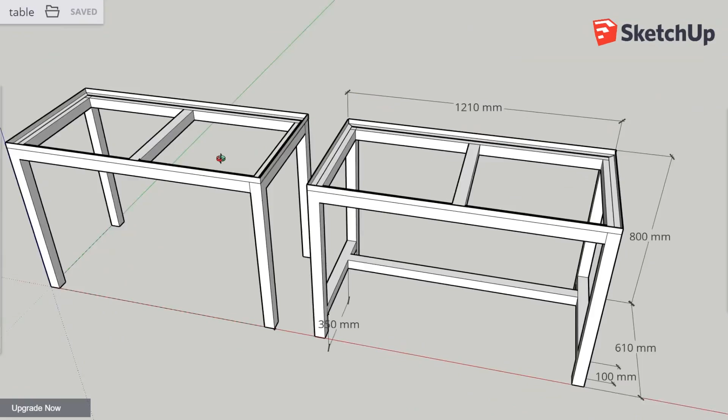So I've just started actually to use SketchUp a lot more in terms of getting ideas down and just trying to visualize stuff in a software program. This is SketchUp Free, and it's an online resource, so you don't have to download anything to your computer. It's cloud-based, I think, and it's free to use. You don't have to pay any money for it. But what it is really good and useful for is rendering out your ideas.

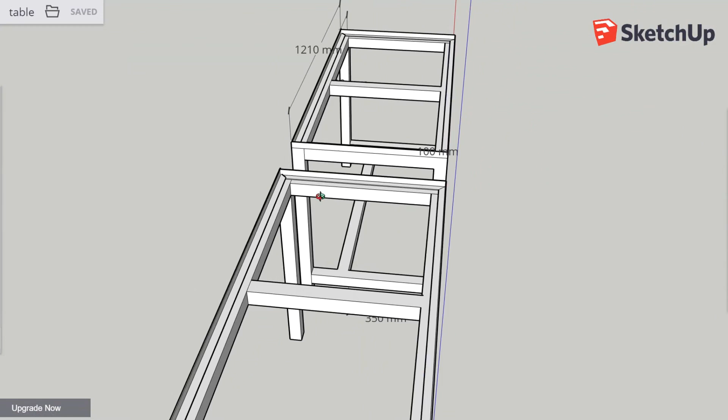So in this instance, the guy I'm making the table for didn't really know what he was looking for, so I gave him a couple of options. Even down to the detail of maybe how the top goes on, or in this case, how the cornicing works and how that's going to sit in, the basic kind of details.

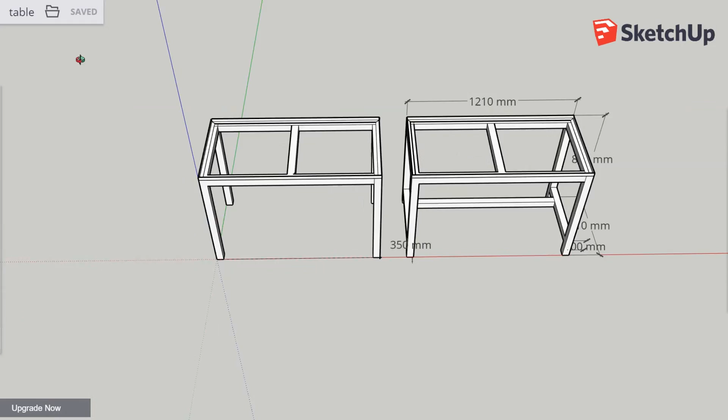But what it allows you to do is give all these different angles and views, and you can just screenshot or record this and send it on and say, well, that's what I think. There's the sizes, dimensions, everything associated with it. What do you think? And it gives your clients or the guys you're making stuff for a really good idea of what you're up to. So yeah, it's really improved my workflow anyway, so maybe give it a shot.

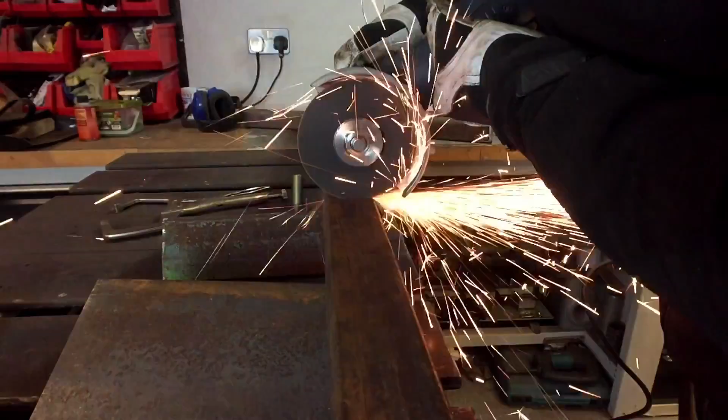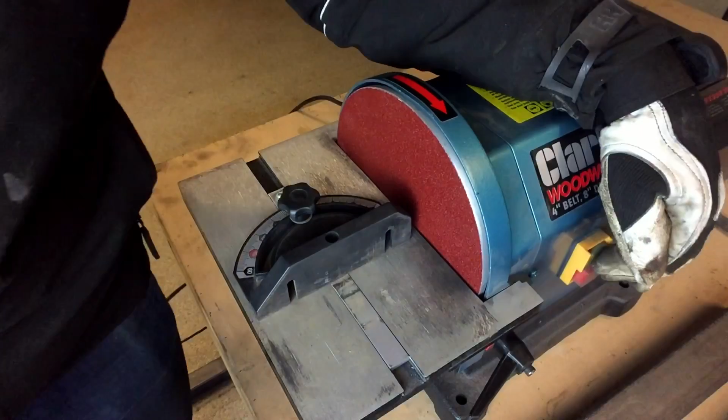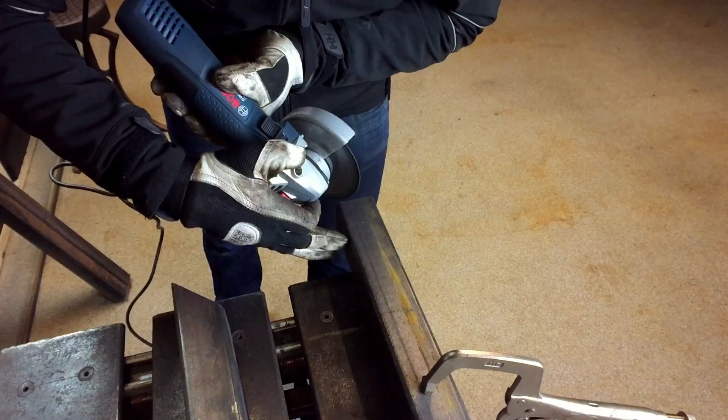Obviously you want to get your base stock material all nicely cut up and ready to weld. I guess you could use anything, even down to a hand hacksaw if you had the time. But one of the fundamental principles is getting things as square as they can be, ready for welding. I do tend to use an angle grinder for most things, just because that's what I'm used to using. It does take a wee bit of time, and if I had another choice, like maybe a bandsaw, I'm sure that would be a better option for me.

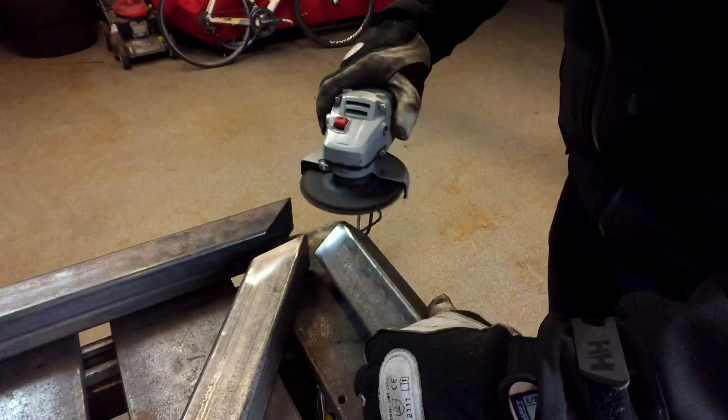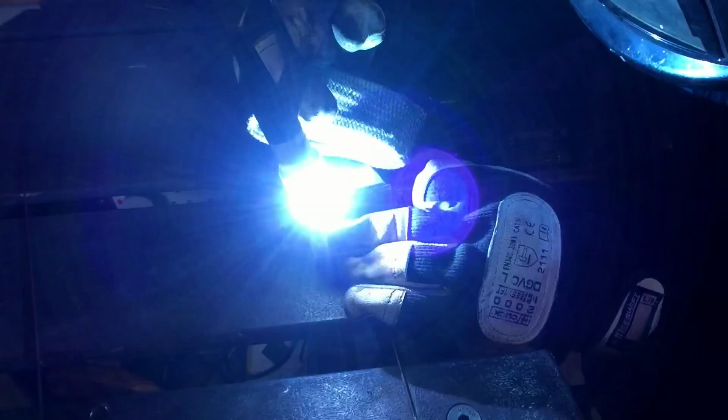It's all in the prep, so make the ends of your tubes as clean as possible. When you get to weld it, it will go absolutely brilliantly. So here it's just a matter of tack welding up the ends to close in the ends of the tubes for the legs, and then we're on to the next process.

Just fabricate them up, hole saws, that's as simple as it gets. And what that allows me to do is, when you're dealing with a 90 degree, offer that up, 2 clamps either side, boom, there you go. You've got a nice clean square edge, get everything nice and squared in, then you make some tack welds up, and you start from a really good base of having a square piece to work from.

Now, although that's a massive help, and I would advocate you go and give this a try, this won't stop weld deformation in its entirety, so there is a little bit of a sequence to go to. Now, if you've done some welding before, you'll know that weld material shrinks. So it will shrink in the direction of your weld.

So if, for argument's sake, and I'll exaggerate it here, if in a sequence you didn't do any other weld except for this weld here and you made a full pass here, this will want to open up like that because the weld material will have shrunk. So it will shrink in that direction, opening up the back. Equally, if you did the top one first, it will want to splay out like that. Bottom one equally would want to splay out like that. Back one will want to pull it apart like that.

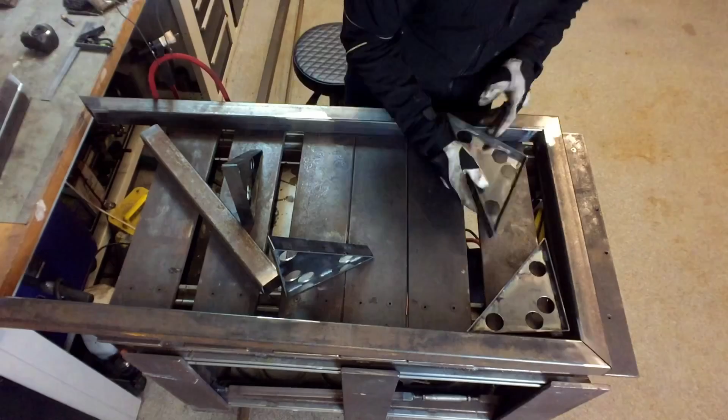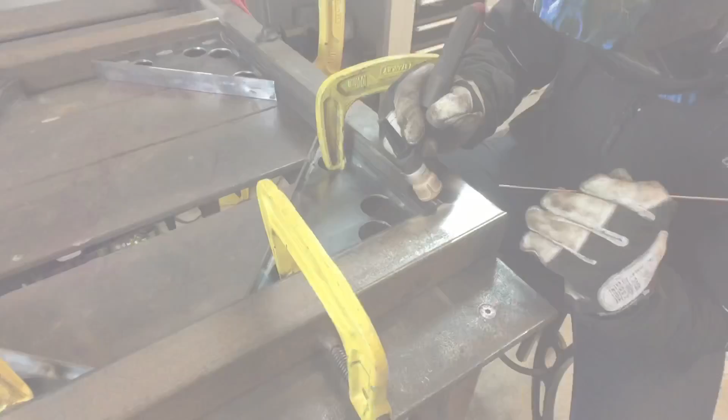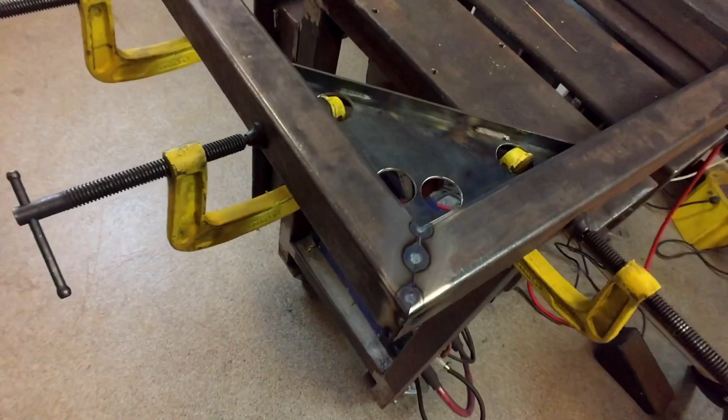So just as I said, squaring everything up is really important to start off with, and here I'm just measuring across the angles, and as long as you get the same across the angles, then you know you've got a square piece. And then I just tack weld up. I tend to tack weld everything up first, make sure it's all square and boxed in that way before doing full passes, and then that'll stop all the deformation.

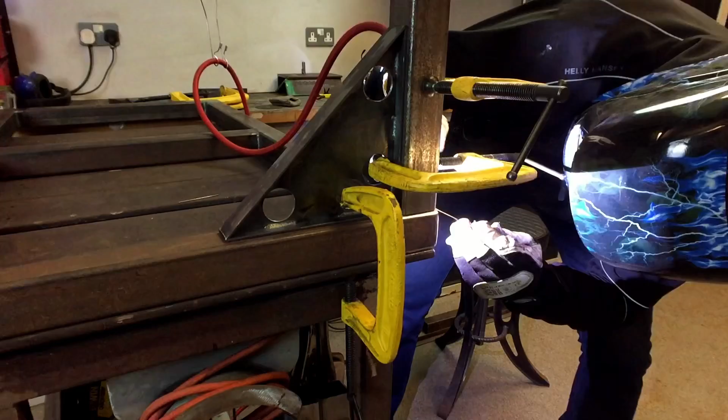And here's how these useful set squares get used, just with all the angles. Keeps everything nice and squared off, especially when you're attaching legs and things like that. Really useful. You have to get into some funky shapes sometimes, but you know, hey, it's all good.

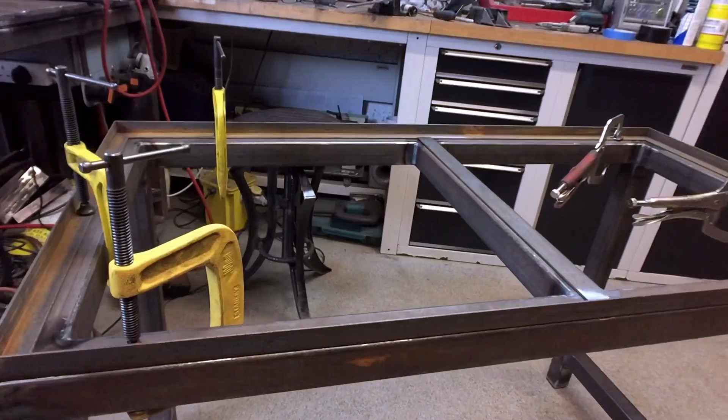So as I mentioned, I've done this sort of angled top just because that's what the client wanted on this occasion, but you could equally do just about anything for a top. But I'll just start to show you the little beaded edges in, and then a couple of nice floaty shots.

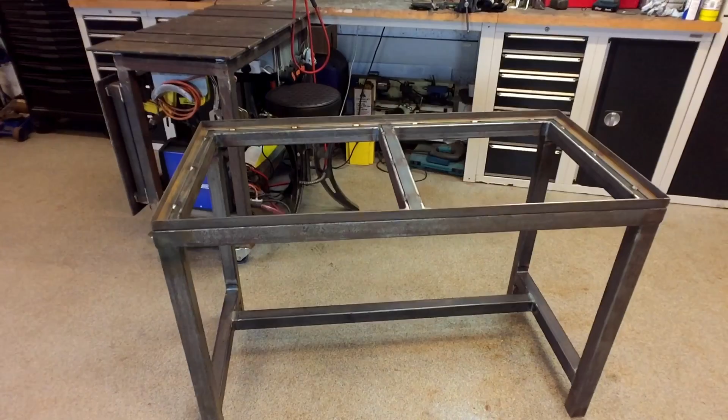Well, here she is. It's all done. And I'm pretty chuffed with the outcome, to be fair. It's come out how I wanted it to. It's got that industrial feel to it, that rustic look to it, and that's what the client wants as well. So he's going to put a granite top in, 2 slabs that are going to go in here, and I think that's going to look really, really nice.

I think we'll just put a lacquer spray over the top of it, maybe, I don't know, but yeah, similar construction to the bench I've already made, but I think it demonstrates the kind of processes you might want to go through and think about when you're building a workbench.